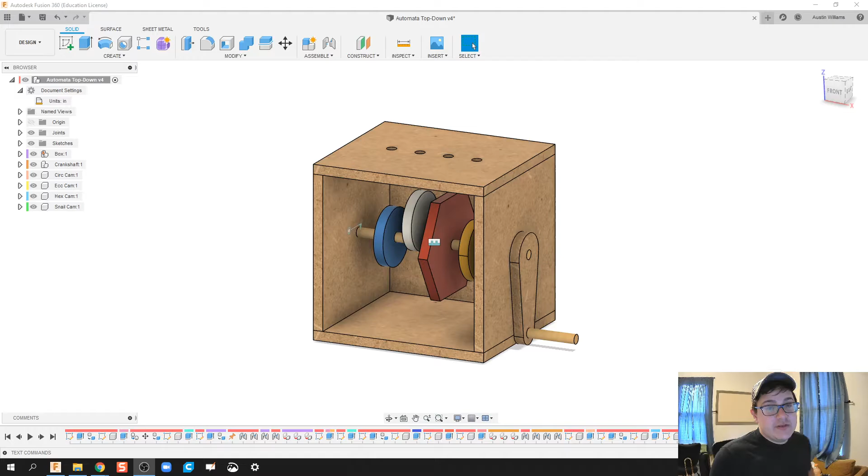Let me get some of those fixed in there. There we go. Alright, here's what we're going to do today: take our Automata box we got so far with our top-down model, and input our follower rods, hopefully getting those assemblies to work as expected.

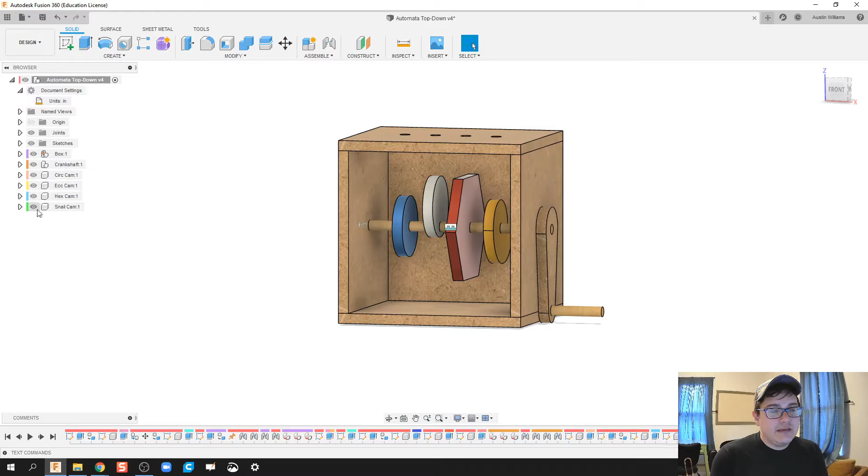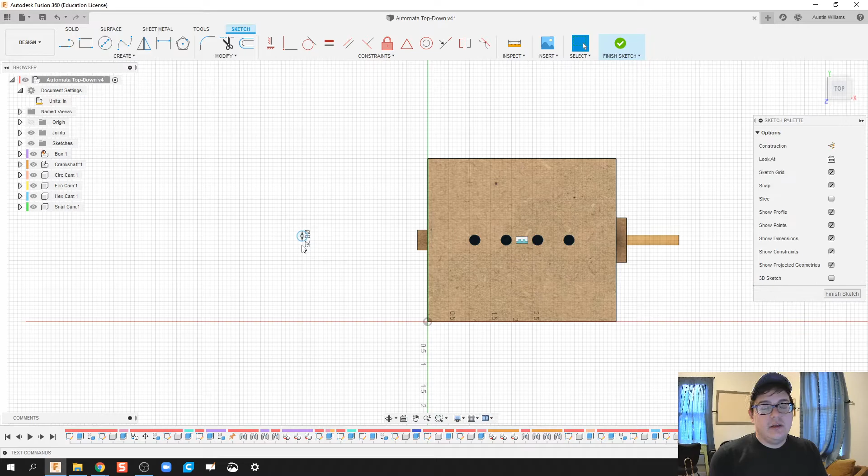So we're going to make our follower rod first. Since I don't need anything else right now, you can inactivate these pieces, but I'm just going to do a sketch in the correct top-down direction. We know our follower rod is going to have a diameter of 1/4 inch. We'll hit Finish Sketch.

We're going to go ahead and extrude this down. 3 inches looks okay. We're going to make that as a new component, click OK, and call this component follower rod.

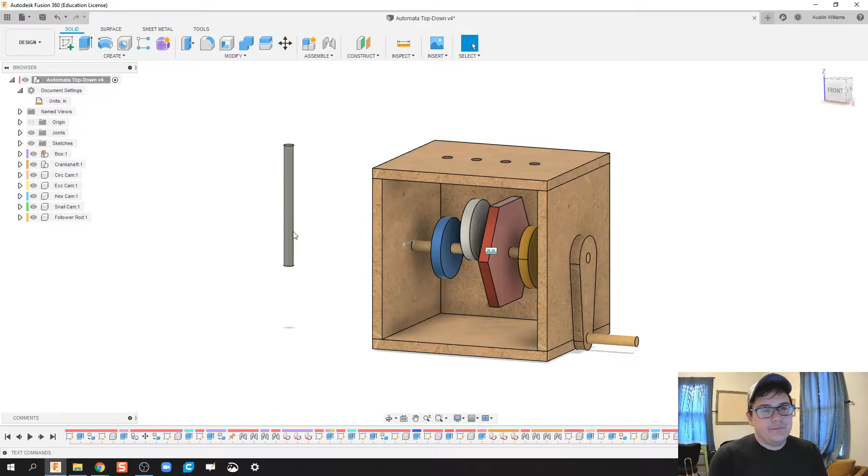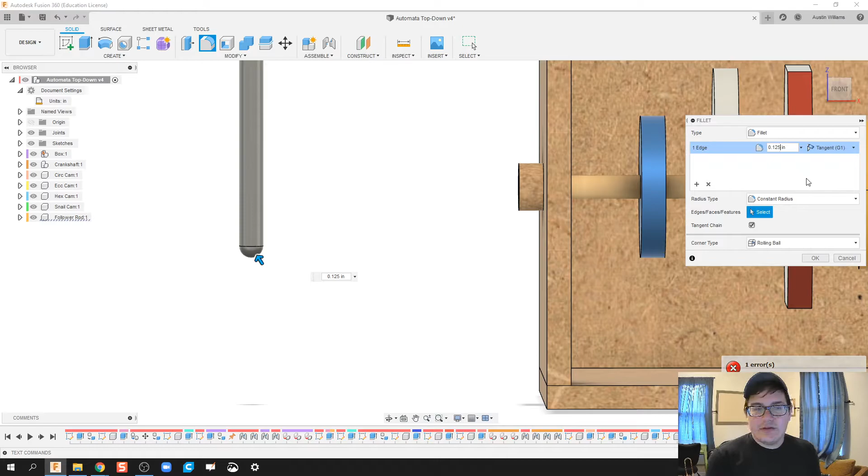Now in here, I'm going to fillet the end of this to be rounded off. For that radius, we'll do the diameter divided by 2, so 0.25 divided by 2. It won't let me do that, so let's try 1.25 - actually I thought I could get away with it but couldn't. There we go, I just had to do 0.125, and we'll call that done. So we got a nice rounded off edge for our follower rod.

Now, if your follower rods are all going to be the same length, we can do a little bit of an easy cheese here: we're going to hit M on our keyboard, and then move bodies - or sorry, no, move components. I'll click on this. Let's see, actually if I click on components, can I make copies? I sure can - let's make copies of our components and see what that does.

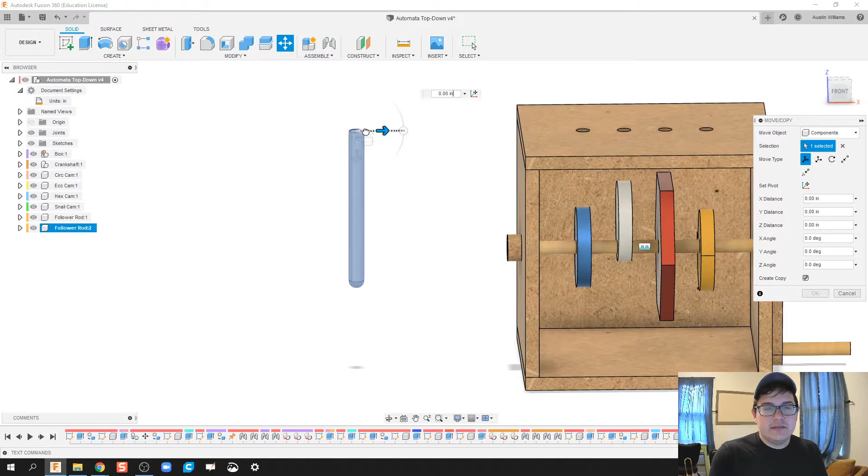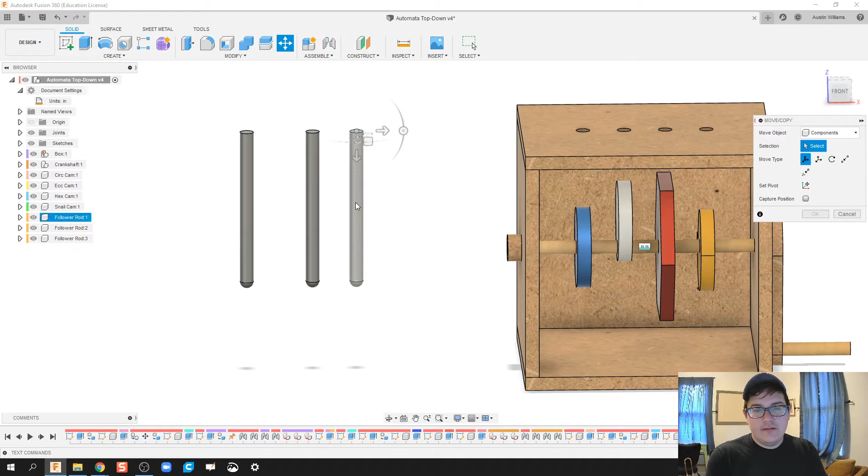So we made a second follower rod. Click OK - hey look, it already made it a component for us. So let's hit the M key again, click on these two right here, and make another copy. So it'll let me do that. I only want you to take one component at a time, so let's just click on that, create a copy, click OK. M, create a copy, OK.

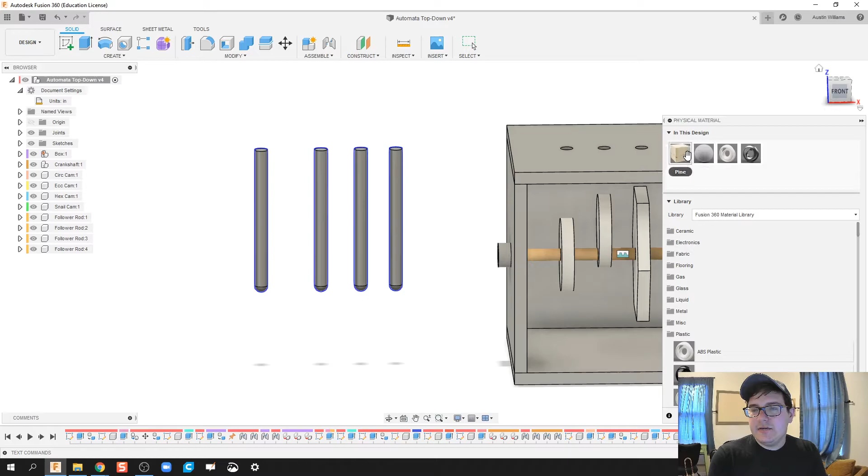So your follower rods may be longer or shorter, depending on what you're dealing with. But what we do know is I'm going to highlight all of these and right click, physical material - and that physical material is going to be pine wood, so all of those are made out of the same material.

Alright, next thing we need to do is some more joint assemblies. So we're going to join the edge of my follower rod through the edge here. By default it's going to be a rigid constraint - we're just going to make that a slider constraint, and that looks okay.

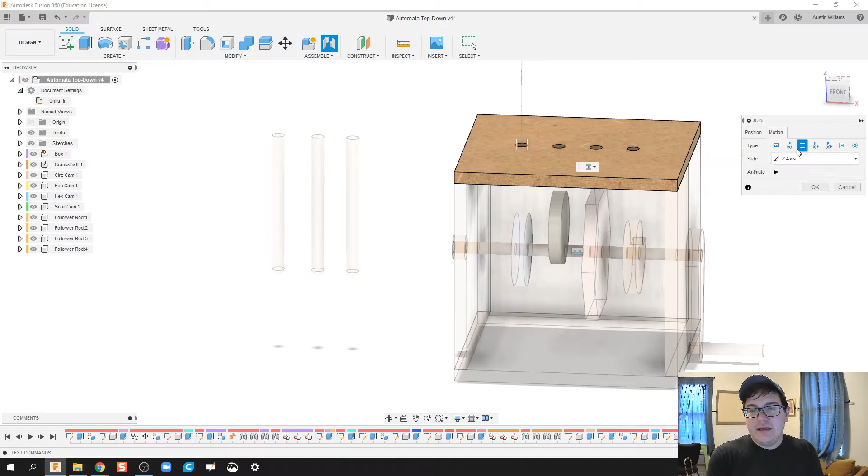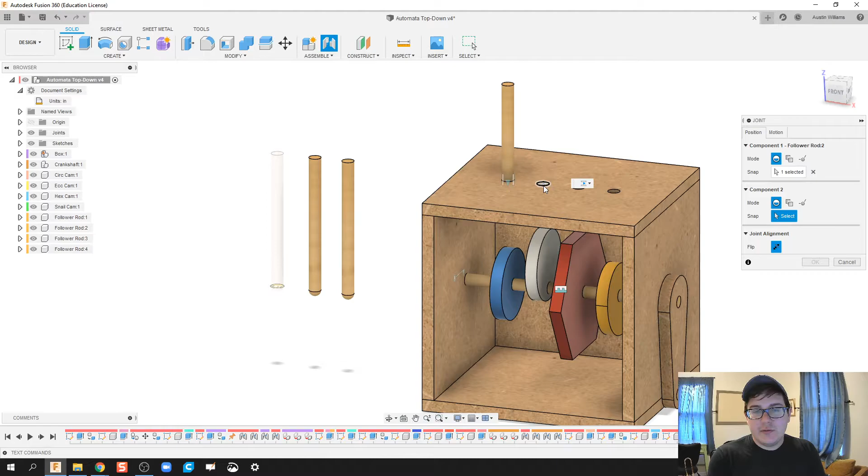What you can do, if you want, is go ahead and mess with this position a little bit - we're just going to bring it a little bit closer. Let's put it right there, click OK. Hit J for joint - we're going to join the edge of our follower rod through the edge of that. It's going to be a slider constraint, and we can go ahead and bring it down just a hair.

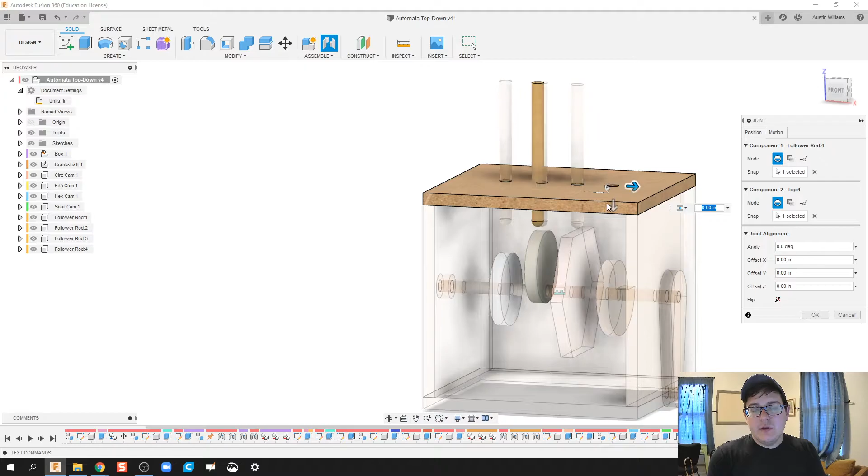Looking alright. I'm going to very quickly get the other two in there as well. Now here's going to be a little bit of an interesting spot: how do we have Fusion talk to the system and get this to work as expected?

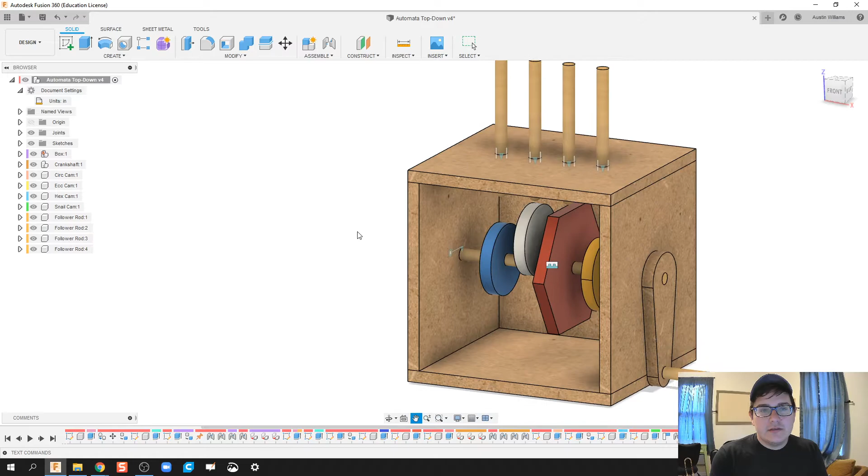What we're going to do is enable a thing called contact sets. Basically it's a way for me to tell Fusion these pieces cannot go through each other; once they hit, they're done. So we're going to go under assemblies, enable contact sets, and I'm going to right click and enable all contact. This means nothing can go through each other.

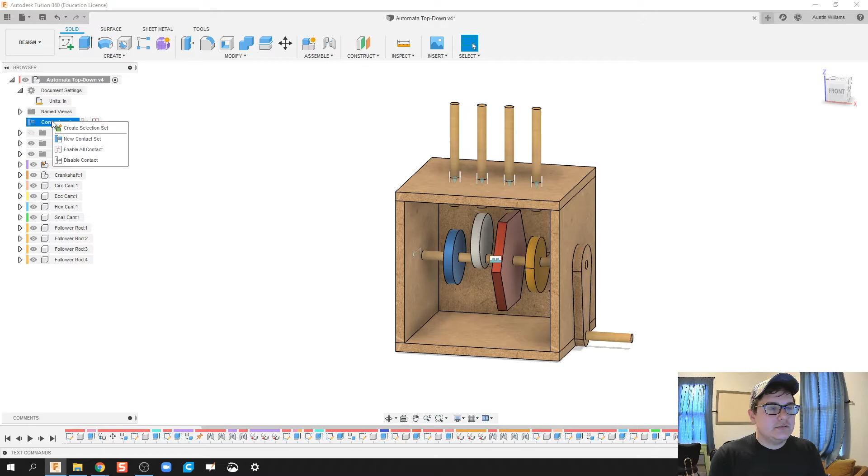Everything is now considered a physical object. If I were to pull one of these down, it can't do that. Before those contact sets were made, things could kind of go through each other, and we don't like that. So: assemble, contact sets, right click, enable all.

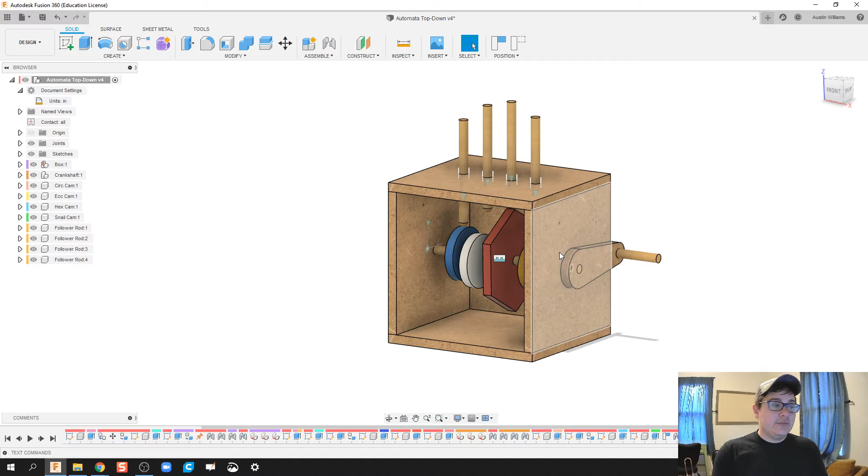That just makes it by default that nothing can go through each other. All right, looks okay. Now I need to go ahead and edit my joint limits, because right now if I were to turn this, the problem is that my follower rods will get pushed up but they won't come back down.

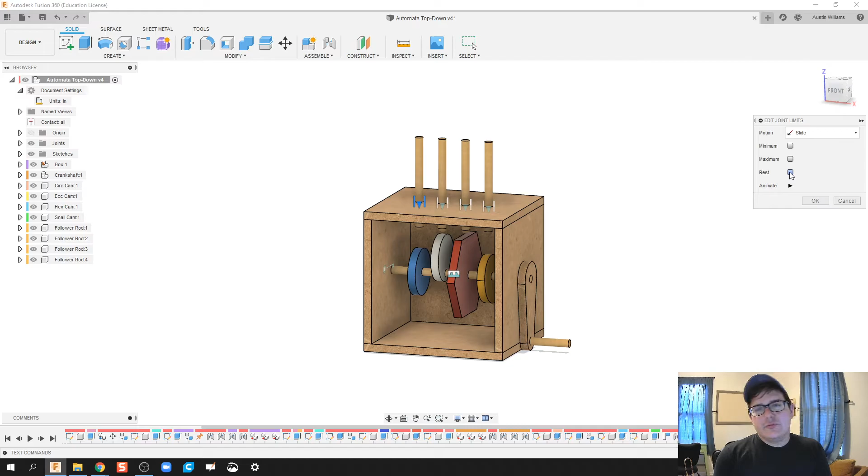What we need to do at that point is make a default rest position. So I'm going to zoom out a little, click on that joint, right click, and edit joint limits, and we're going to create a rest for it. The rest is kind of like a resting point - if nothing's pushing it, where's it going to go back to? I'm going to make that rest point a little farther than I know the cam is going to be, so the cam is always pushing it, and the follower rod is always trying to go back to rest, even though it won't actually get there. So I'll click OK.

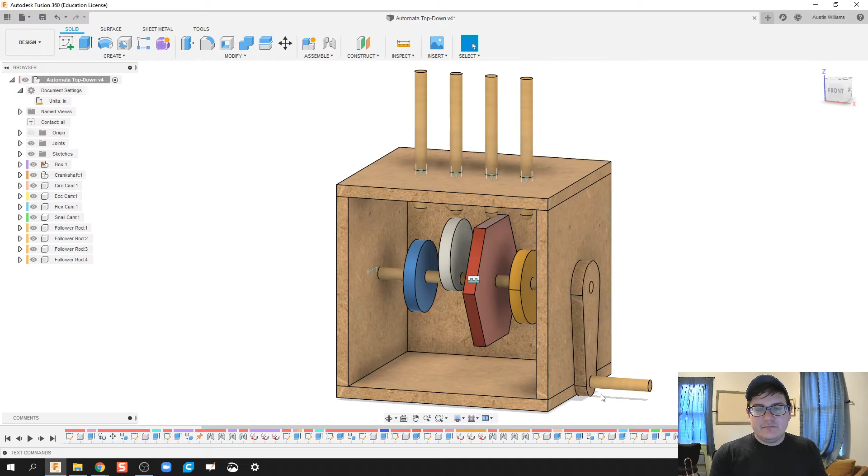Now if I rotate this, my circle cam just sits there - it's a circle cam, doesn't do anything, you can't see anything to begin with. So let's edit this one as well. I'm going to zoom out a little so I can click on that joint, right click, edit joint limits, make a rest - you can just make a rest of 1 inch, or drag it down a little. Half inch looks okay.

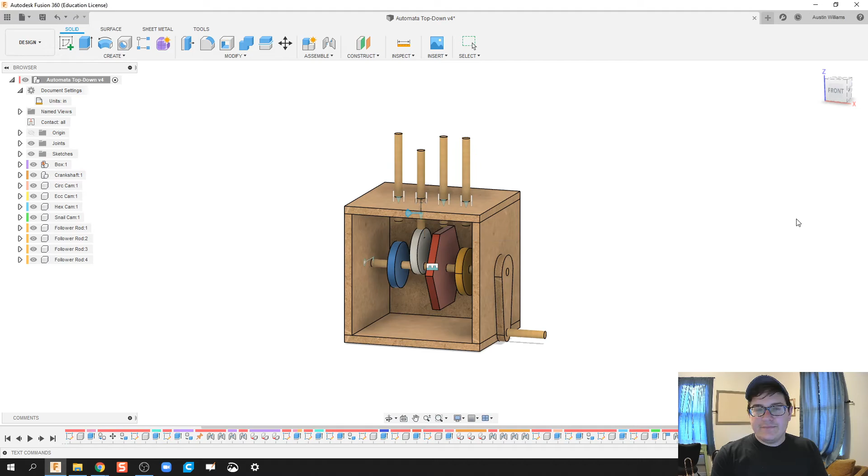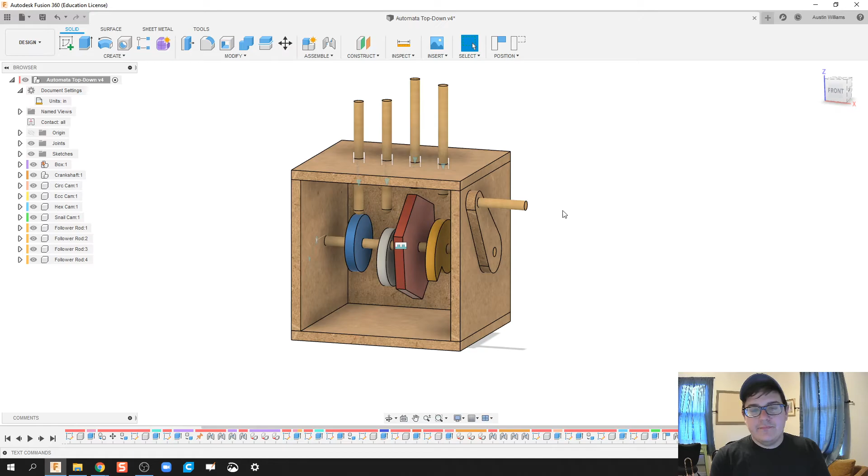All right, now if I rotate this, we see my rest limit actually wasn't the full length it needed to be, so we need to go back and edit that. Let's try again: edit joint limits, let's just go ahead and make this 1.25. Click OK. Now let's try rotating this. Hey, would you look at that? Things kind of work as expected.

Alright, we're going to revert that position and do the same thing for the last two joints. Right click, edit joint limits, make a rest - the hex cam isn't going to move very far, so we can still make it 1 inch for consistency's sake. I'm going to edit that last one as well, make that rest - let's call it 1 inch. For that one we might need 1.25 since it's the snail cam.

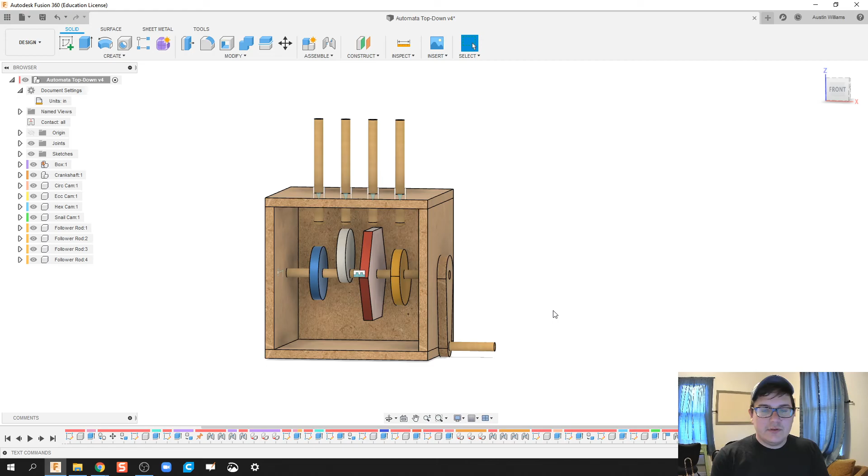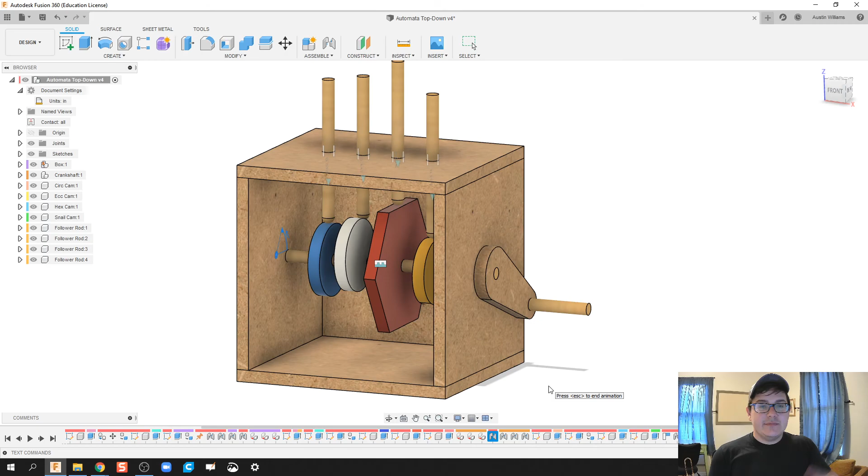Click OK. Now, if I've done this correctly, we can go over here and animate the whole model, and things kind of work as expected. We see our circle cam is doing nothing, our eccentric cam is moving pretty easily, our hex cam is kind of bouncing up and down, and our snail cam is kind of working as expected.

Well, ladies and gentlemen, I think that's going to be it, and we're going to call it done for this video. I am going to do a follow-up video on this and continue looking at motion studies - just to open up something new for automata and look at motion studies and how they work. But we'll save it for the next video.